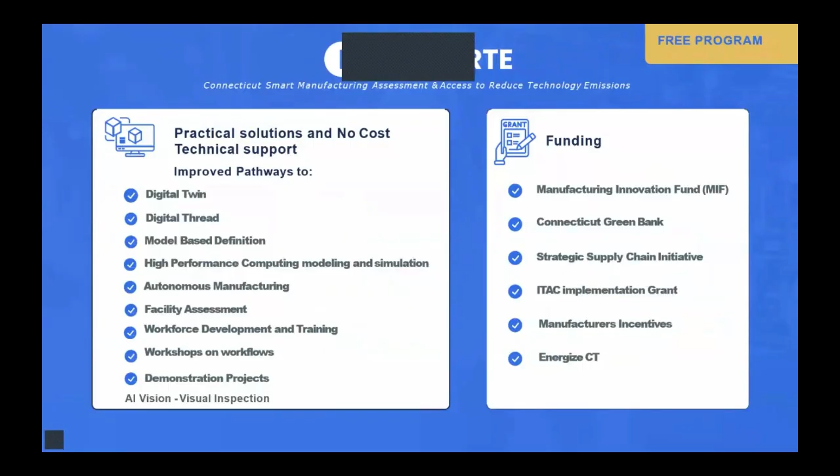So we have a very exciting presentation, as I mentioned before. We're lucky to have Lars Faller, Bobby Cole, and Dan Kavanaugh with us here today. I can't wait to have them come up to present the respective technologies that they've been pushing and advancing. I'd like to give a quick introduction to each one, so that you have a bit more background on who is speaking here today.

Lars Faller started his career in manufacturing and has held many roles, from manufacturing engineer to applications engineer to design engineer, before ultimately starting his journey at Siemens Digital Industries, where he specialized in the Siemens SINUMERIK control and advanced shop floor manufacturing technologies. 4 years ago, he decided to take the next step in his career and focus on account management. Today, he's responsible for leading the global automation strategy for one of Siemens' largest enterprise customers.

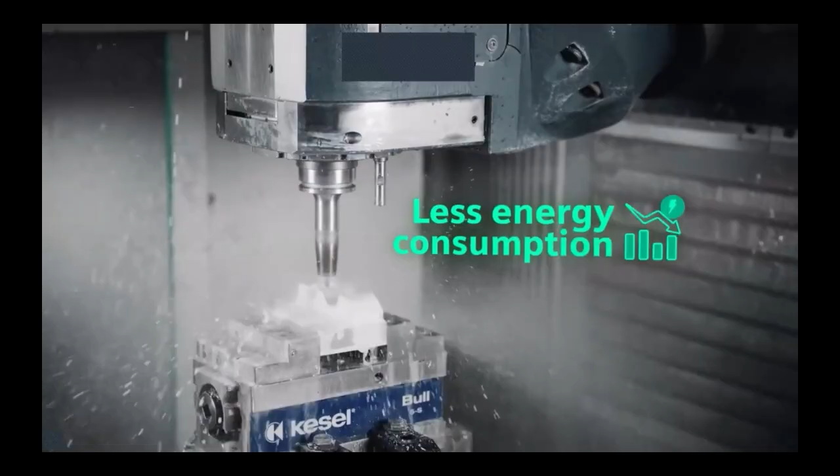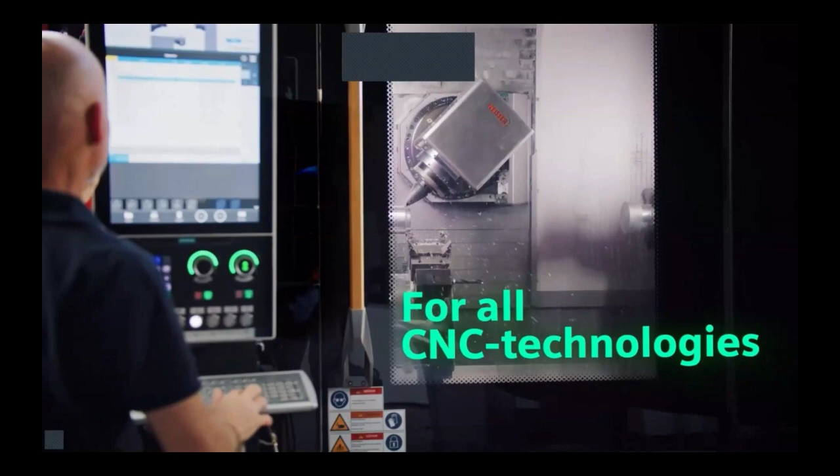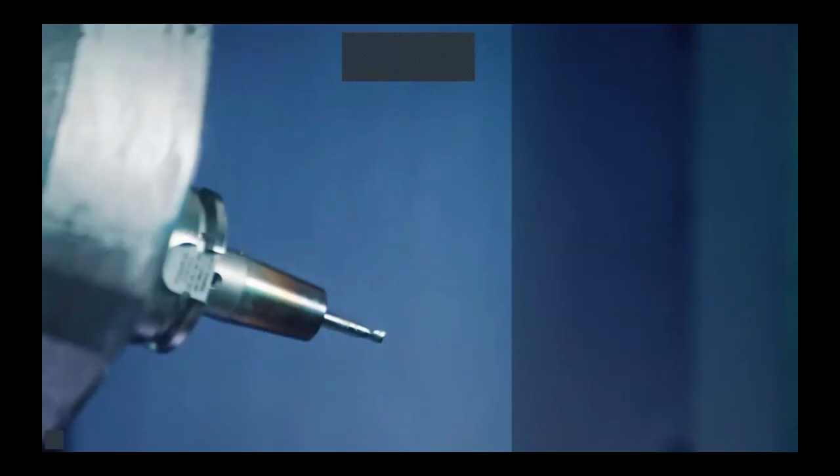Built for sustainability. Performance that leads. Designed for the future. Empowering the future of manufacturing. SINUMERIK ONE. Turn your ideas into reality.

Okay, that's enough with German music for now. So in that video, you saw quite a few things. Anybody who has any experience with SINUMERIK is probably well aware that the options there are pretty vast. If you were to get into the CNC control system and start to make changes, we have tens of thousands of machine parameters, options, applications, very complex. But I'll be here all day. If you guys have any specific questions, just let me know. Certainly, we don't have enough time to go through all the options here on the slide deck.

But beyond the Comau robot cell, there's also a vertical machining center. There's a second one being installed here shortly. We got some DMG Mori laser equipment back there behind us as well. So lots to talk about. The one thing I want to focus on now, and you saw it in the video as well, is that there's many different technologies represented from a manufacturing perspective. There were some vertical milling centers. There was some turning equipment. Obviously, here we're showcasing some robotic equipment.

The big takeaway here is that the SINUMERIK CNC control quite literally does not care what it's connected to. So it can be running a 2-axis lathe, a mill turn, a turn mill, a laser additive hybrid. It truly does not care, including robotics. And that's what we're here today to see and check out for the first time. And I'm grateful that we have Bobby and Dan from ThinkPLC here today, truly the subject matter experts when it comes to this integration.

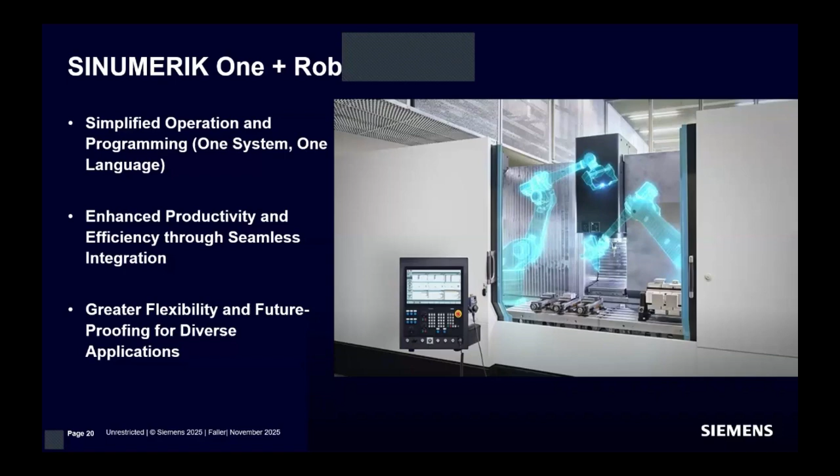Now we have a quick video on robotics, and I don't know if anybody's familiar with the trade show EMO. It just happened a couple of weeks ago, actually, in Germany. There's a very cool video that I like to put on here just to showcase some capability, because certainly using CNC for robotics and machining is something that's quite new and probably not really accepted yet. So

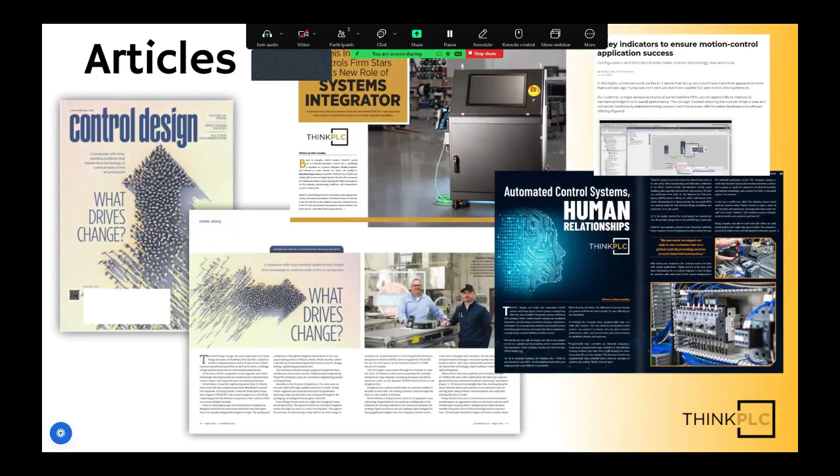Appreciate joining you. If you Google us, you'll find all kinds of propaganda, a lot of it using Siemens technologies. You'll see us in a lot of articles, whether it be for Krispy Kreme donuts, where we build all the control panels that go around the world on their control systems, or something integrating robots, pretty eclectic. Also, we're very active with education, which is one of the reasons why I'm here. So we like to get out in front of folks and promote what we do in technology.

And from a technical perspective, I would utilize and lean on the marketing and education capabilities of Siemens, like you have here. They have full webinar series. If you're interested in how to get into this world of making things work, there's free education out there everywhere. And some of that's through the TIA Portal webinar series. This just happens to be one that I joined on about a new programming language.

And to Lars's point, we're kind of a rarity. We're a systems integrator, but we're the only factory automation certified and machine tool certified integrator in the United States, making us very standalone or rare. But when it comes to education, I want to start talking about some of these buzzwords you're hearing.

So 5 years ago, I was educating board members at large corporations on what edge and IoT was. It was coming down that we have to go with edge, and if we don't do IoT, we'll be out of business in a few years. So I'm explaining in layman's terms what that meant for them. And so we advanced forward just to come back to what the digital thread is now.

And so large folks like Ford and the large automotive manufacturers have been focused on the digital thread for many years. And for us small to medium-sized manufacturers, we just couldn't afford it. We didn't know what it meant. And really when you hear people talking about the digital thread these days, what we're doing, we're backing up and we're trying to pull in more what we need, all right, as the end user.

What do we need out of what we're implementing technology? Because you don't just implement technology to implement technology. I wish you did, but that's not best for you guys, right? And so how do we define scope in a way? How do we leverage our lessons learned before? And how do we bring that back to the small, medium-sized folks? And that's what the digital thread is now. So I want to talk about that a little bit more.

So one of my favorite movies of all time is Apollo 13, just amazing drama about heroism, American history. Everybody know those five famous words? What were they? Houston, we have a problem, right? So it's really a story about systems, believe it or not, logical systems.

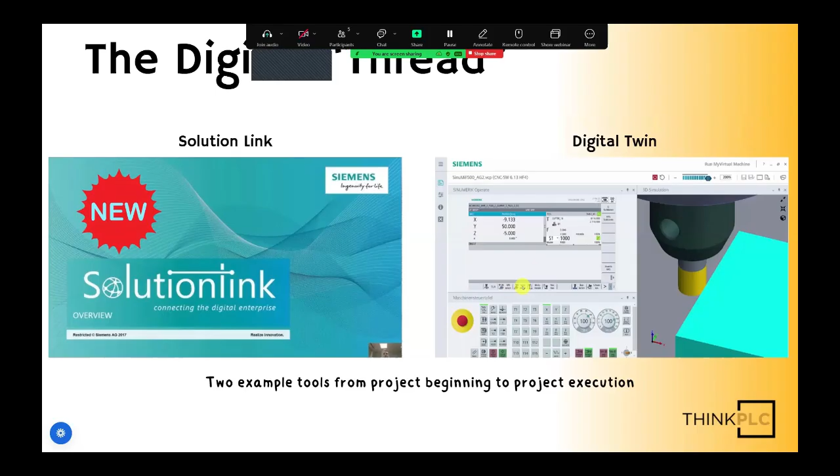And what that does is instead of just, you know, Bobby has some little buzzword or some technology he's good at, I don't just throw that at you. The end solutions or products, it's not even a conversation. It's about how to solve that problem, and then the product phase comes in later. So we're not just doing things the old way. And then when you implement the digital thread, the true implementation is going to be when you simulate, and even simulate where you're tied into the real world. So you're connected to the real world system. So we'll show you a little bit more about that today.

Some other new technologies are out there. Everybody's on the AI kick, right? You got to be in the AI world. For us implementing this technology, there's a new website available by Siemens called the Automation Knowledge Guide. Think of ChatGPT, because that's essentially what it is, but it's focused for Siemens, and an operator can say, why did my machine stop with this fault code? And not only will you get the product manuals that could be engaging for that, but you can also have this write code for you. So Ryan and I are pretty nervous right now. AI is basically writing PLC code, which is how we make money. But it actually puts out really good PLC code, G code for your SINUMERIK machine.

If you forgot syntax, you can ask it. It's a free utility. It's out there. It's available. From a design perspective all the way through to an operator perspective, it's going to help you guys out. So I suggest you play with it.

Okay, while we're here, Run MyRobot. You've obviously heard a lot about it. It's where we're taking Siemens product technologies and implementing them on what we consider a commodity robot. Through the partner ecosystem like Comau and other manufacturers, we're taking the industry standard. I want to make sure this is clear: you don't have to design your robot. We're taking an industry standard off-the-shelf robot and implementing Siemens technologies on top of it to make it do what we want it to do. So I'll explain to you how ThinkPLC plays into this.

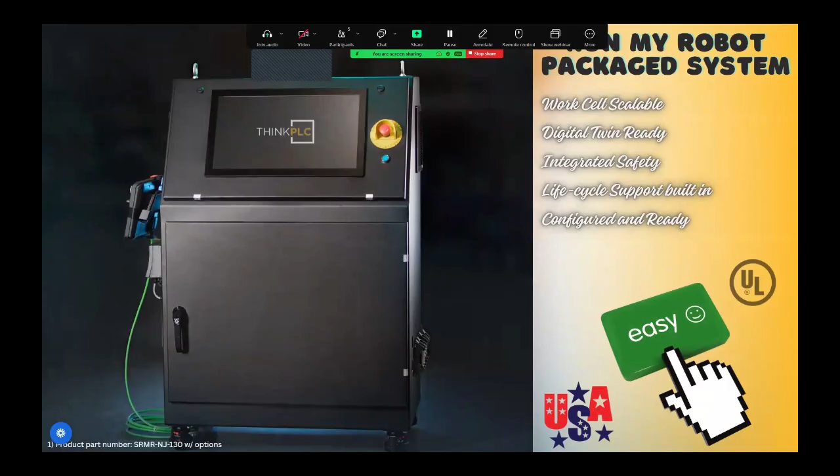Siemens makes this great hardware and software, and then you have folks like Comau who make an amazing robot. So who's in the middle of that? That's ThinkPLC. We have an American-made control system that's packaged up. We've become the easy button for Run MyRobot applications around the world. We have this packaged up to make it easy on you and your customers. As an example, we assemble these down in North Carolina and ship them around the world.

There's an example of an NJ130. That's a big old robot, and we've sold many of these packaged with our Run MyRobot solution. Our solution is a UL certified system. It's basically an enclosure with all the good stuff, the software and hardware done for you. You have the low voltage control system, as we'll talk about in a second. You're going to see this box in action next door, by the way, so we won't PowerPoint you to death today, I promise.

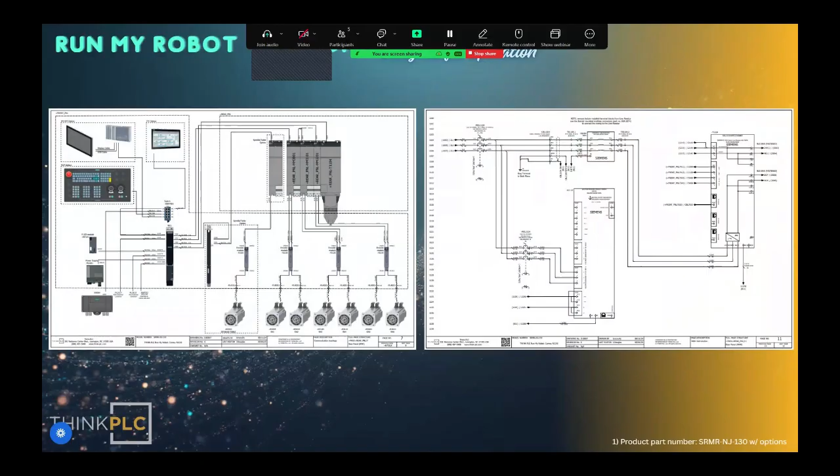Why would people do this? Because we've already done the heavy lifting. We've already done the design. You get to own all that. You plug this in, put power on it, start your robot up, and you're doing machining processes. Some of the other things we've done made it easy to connectorize. Just like your standard commodity robot, we have a teach pendant deadman switch that you control, but you have additional features like hand wheels, like you have on a machine control panel if you're used to the CNC environment.

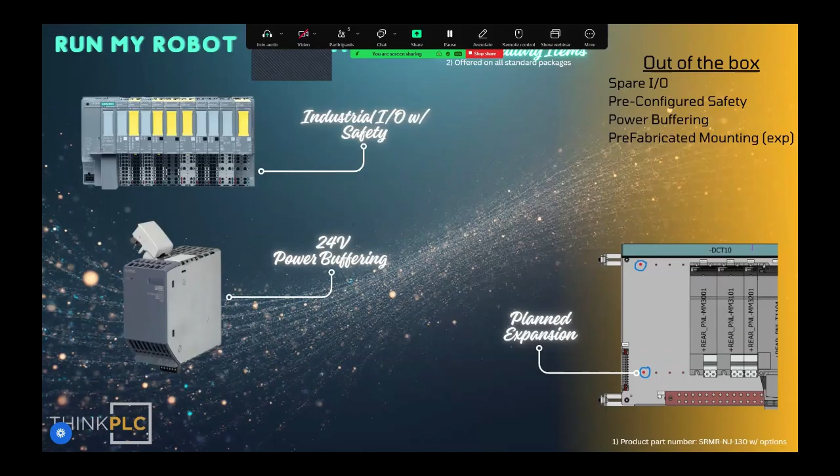Other things are industry off-the-shelf products like Siemens drives and IO. These are things you can call a local distributor for. They may or may not have them on the shelf, but they're more commoditized locally, because these are the same products we use in factory automation projects, like running a conveyor. We've brought those into the same package. As an example, this is what these boxes look like when they're all packed up and ready to ship.

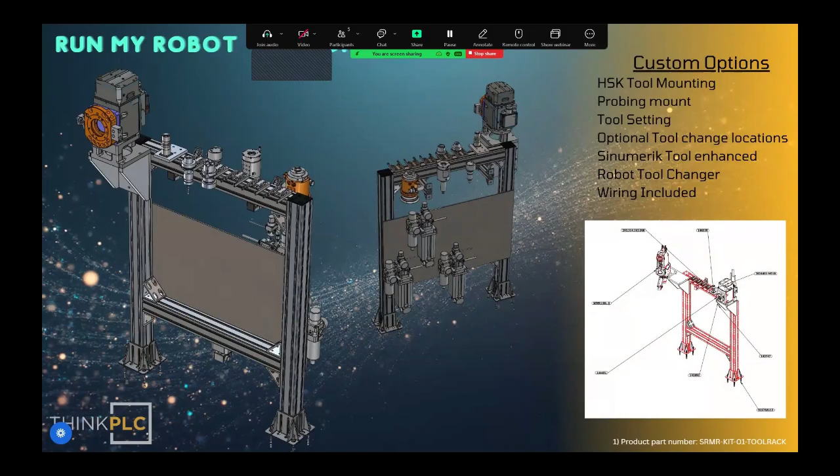Other ancillary things we educate people on are solutions around the robot: machining, welding, additive. These are common practices. We have spindle enclosures, so if you need to do tool changes and run your spindle, we have packages already pre-built so you can go to market with your robot doing the machining process. Things like tool stands, where you can uncouple your weld head and pick up a milling head. So you have a multi-purpose machine you can customize. Instead of a fixed DMG Mori machine, you can machine with a robot, then laser weld or MIG weld with it, using all the same features you get in other CNC applications.

Often with our robots, we package probing solutions like Renishaw and Blum packages. We're a Blum distributor. Just like in a CNC mill or lathe, you need to probe the part to find it. Or if you want to reverse engineer a part and build yourself a CMM, you can have the robot do that. This is getting very popular, especially in aerospace. The great thing is you don't have to do anything custom. You can use the standard measuring cycles, or probing cycles, built into the control platform, with no custom software needed.

Then it comes to advanced safety. You have a robot. These are not collaborative robots. These are very beefy, very complex systems. You can now integrate what's called SIMATIC Safe Kinematics.

And so what that does is allows us to essentially build virtual fences from a safety perspective. And then using the TIA Portal software, we'd use to program the PLC that's, I don't know, running a pump in the building, use that same software to build the safety system.

And so instead of having multiple PLC manufacturers, then a robot manufacturer, which is very common today, we can do it all in the CNC PLC. We don't need other control enclosures and other technologies. You can do it all built in the same platform.

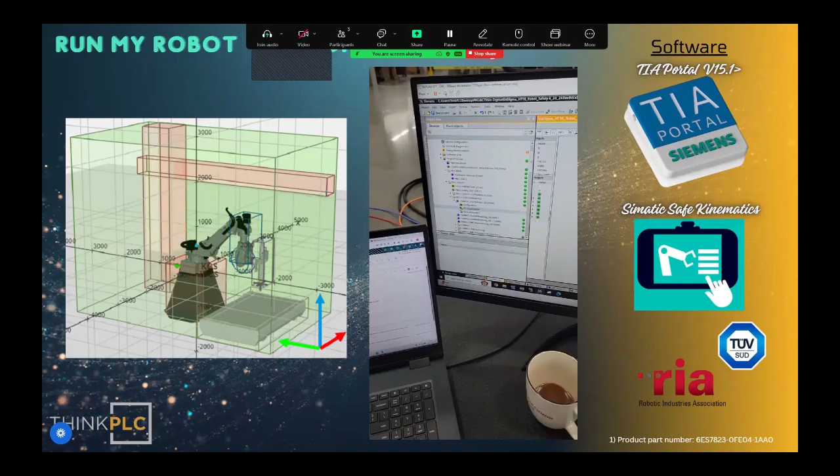Okay. So when you put all this together, there's a way to digitize it so that you can build your PLC program. You can build your machine yourself by embedding in your step files for your machine. You can animate those just like you would in SolidWorks, NX CAM, whatever you use. And we bring them into the digital twin. I'll just bring that up for you.

So there's two platforms. There's one called Create My Virtual Machine, and then there's one called Run My Virtual Machine. So Create My Virtual Machine is where you as the end user, whether you're a machine builder or you're just an end user that builds your own machines, it allows you to have a virtual CNC system. It allows you to bring in your step files or STL files, however you like to work.

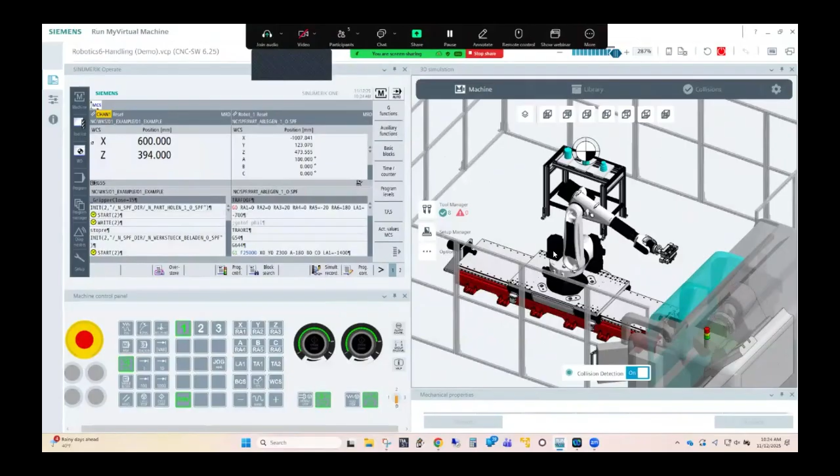And then you can animate those, like you see the robot with the lathe here. And what that allows us to do is then automate our system. I turn on the TIA Portal PLC simulator, and then I can pull up TIA Portal and I can do all my ladder logic or SCL language. So I can actually test my PLC and how it's going to work alongside the CNC control. It seamlessly is built in.

And then we can add on to that what's called the SIMIT software. So if any piece of this I have real world hardware I want to work with, SIMIT software takes the digital world and connects it to real world hardware. So you can have the downstream machine not available yet. You can put my real machine in SIMIT and then use the digital twin to parse the actual production line.

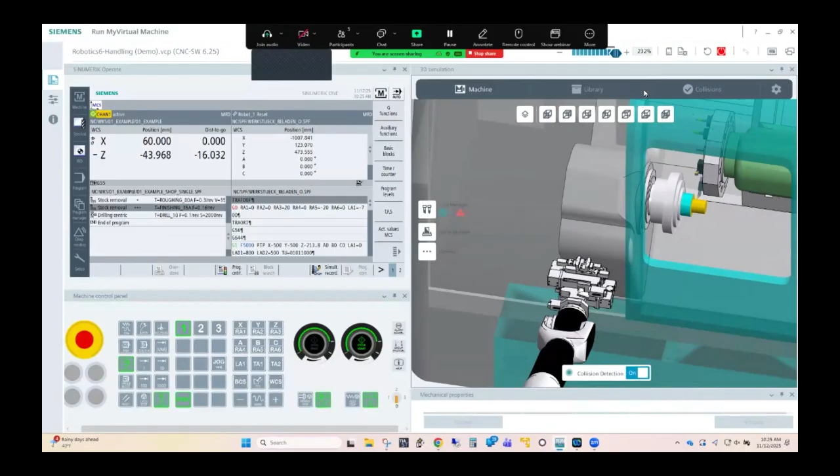We're actually doing machining processes as we speak. This is good. This is something that came up recently. Obviously, you see it removing material. If you're doing additive where you're laser welding or MIG welding or 3D printing, you can actually have it grow the material. So you can see your additive product actually create inside this platform. So it's being used quite often for not only removing material, but adding material.

Have I lost anybody yet? Any more jokes? Okay.

So it's cool to talk about stuff. Then it's like rubber hitting the road and actually making things work. So a couple use cases that I want to share with you, and what's great is I'm talking about these use cases with partners, or what we call our ecosystem, where we've worked with Comau. Comau supplied the robots either to ThinkPLC or sold them directly to our end customers, which is fine. And then these end customers or partners will use our control package because it's the easy button, right?

Could they build that control panel? Probably. But why, when ThinkPLC has a UL sticker on it and it works? So it becomes the easy button. In this case, our partner is Six Sigma, which is an amazing NX CAD CAM supplier, big in aerospace. Some of you guys may know these folks.

We were brought a complex task that I can somewhat talk about. I can kind of show you with cartoons. And I can talk about how we probed this part, and we did very advanced motions to work about this part. I can't tell you what we did on the part, just say that the part was profiled. And so as you're getting the hint, we used the NJ130 just like CCAT has here with the HITECO spindle, and we used the probing package to do just that, and saw amazing success with that.

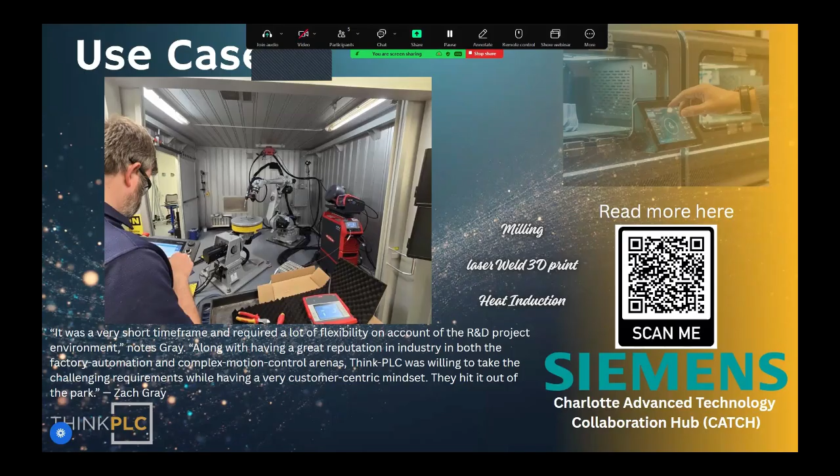So I'll just wrap this up in what Run MyRobot isn't, and you'll see some processes live over here. Run MyRobot is not a commodity application. We're not going to do pick and place, right? You're not going to be palletizing boxes on a pallet. If you can do that with an ABB robot or a FANUC robot, that's great. I'd suggest Comau, but nonetheless, they can all do that.

If you need a very advanced interpolator that is very, very precise, okay? If you need to interface with a SINUMERIK CNC control, it's a good solution, okay? But what it's not is a commodity style robot. Is it affordable? Yes. Are creative applications doable with it? For sure.

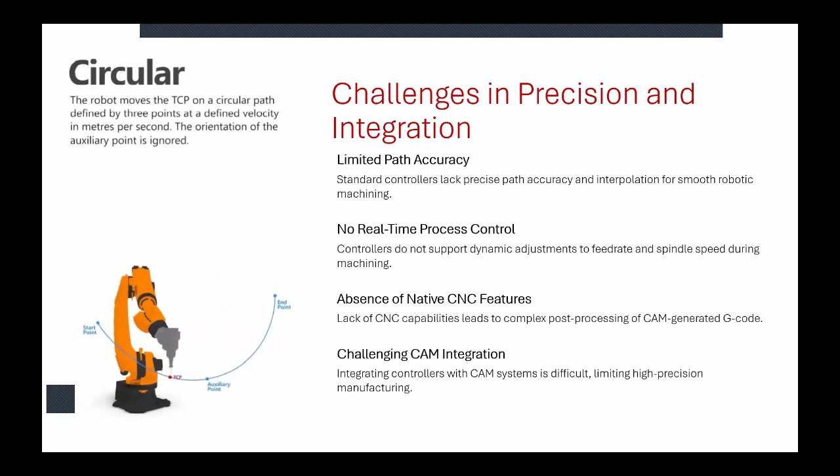Absence of native CNC features: lack of CNC capabilities leads to complex post-processing of CAM-generated G-code. I'm going to go through a walkthrough in a couple slides that compares the workflow of generating a machining program on a standard robot controller versus the SINUMERIK ONE, so you'll get more detail there. And then it's challenging to integrate with CAM. Integrating controllers with CAM systems can be difficult, limiting high precision manufacturing with standard robot controls.

Let's take a look at how this compares with SINUMERIK One and Run MyRobot. We have that background and the introduction of the technology with Lars's presentation, and of course with Bobby's presentation as well. So some of this is going to be repeat, but from our perspective, I'd like to run this video real quick. This is a Siemens production here.

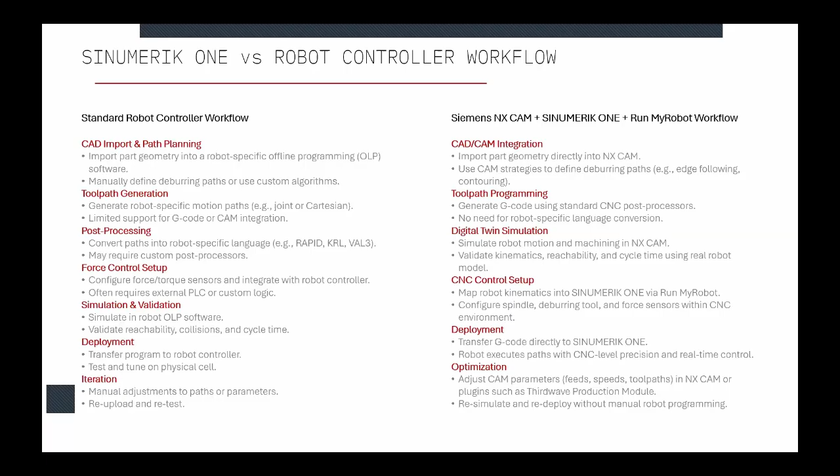Another quick video to show force control. This is a Siemens production.

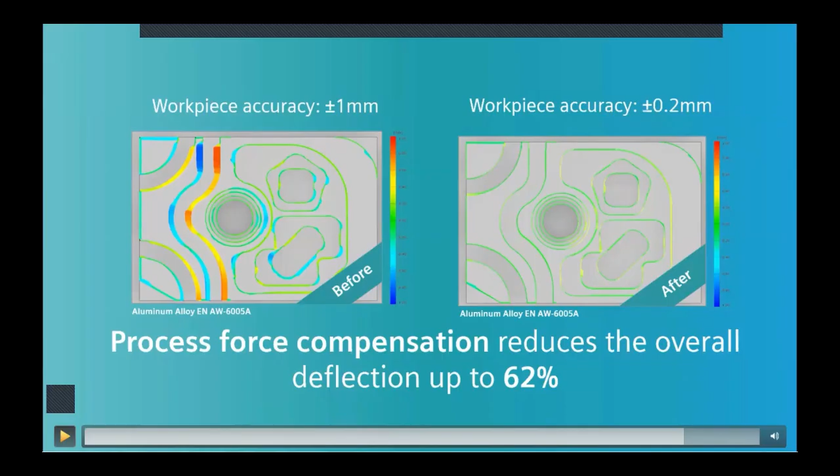So we saw a little bit about the force control feature there, where the system adjusts pressure dynamically to maintain quality and avoid part damage itself. There's adaptive pathing, so real-time response to part geometry ensures precise deburring and polishing, as well as machining. I left that one out. Sensor integration. Sensors provide data enabling dynamic parameter adjustments for consistent quality. And then altogether, you have improved quality and reliability using robotics for these types of machining applications.

So in this video, this is kind of going into now the end effectors and what other kinds of technologies you can add to the system. And here we're going to be showing an ATI radially compliant deburring tool. What this is, it allows you to further compensate for geometry distortions or actual geometry that you're processing on the robot. And you'll see here that the actual deburring tool will give way, and it's controlled pneumatically. So you can allow the tool to be more rigid or more flexible depending on the air pressure.

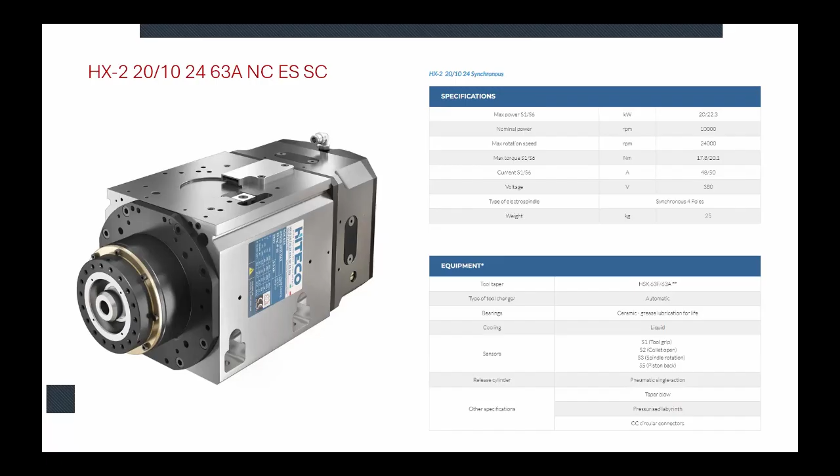So here, it's full synchronous, so that means that we can do tapping, we can dynamically control the RPM on the spindle. And this is gonna allow us to do robotic machining demonstrations for you. So again, the system that you'll see when we go over there is being set up not for CCAT, it's being set up for you so that you can come and actually see what the robot with this advanced controller along with these end effectors are capable of doing for you and for your businesses. And of course, you've met the solution providers here that can go in and very quickly stand up these solutions within a matter of days.

These are some future integrations. We're going to get an orbital single lathe positioner. The model here is a PTS ORB 1000. It's a 2-axis, essentially like a trunnion table. So we'll have 8 axes of manipulation on parts. We already have in-house the radially compliant deburring tool, the RC 230, not the 490 that you saw in the video. It's a little bit of a different system here. And then an axially compliant finishing tool that is the AOV-10. Both of those, the deburring and the polishing tool, are from ATI. The orbital single lathe is from Comau through ThinkPLC.

So again, with the high-end CNC control, you're mapping 5-axis tool paths to 6 motors on a robot, right? How do you control those motors in such a way where you can achieve an accurate end product? And the Run MyRobot solution does that. Tool synchronization: machining tools like spindles and deburring tools are synchronized for seamless operation through the control, not through a separate system. There's safety and tool changer integration that's possible here. So Siemens PLCs manage safety and tool changes to ensure efficient workflow, as mentioned. This creates a really robust system platform. So the configuration supports advanced robotic machining with high payload precision.

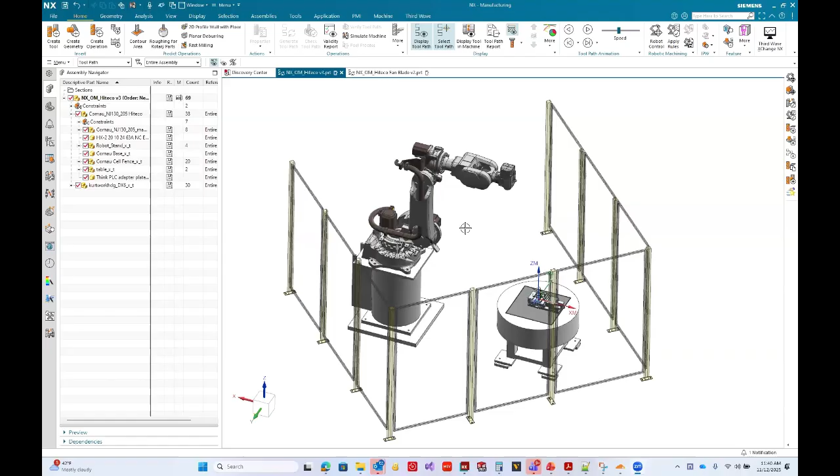So here I'm in Siemens NX in the CAM environment, and we have our cell built out in here. If you just look at the Comau NJ130, this is what's called a machine kit. And I have my part in the vise here on the table. This is our demo piece that consists of a lot of different kinds of prismatic features, along with some that are not prismatic, just some surfaces there.

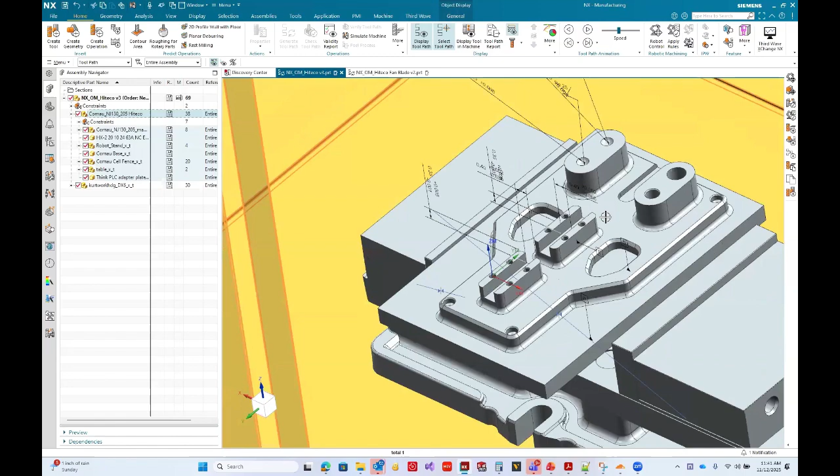And in the past, we have shown how we can actually use all the advanced functions within Siemens NX CAM for it to actually generate the CNC operations for you. And it does that by analyzing the geometry. It does a manufacturable feature extraction. So it looks at the slots, the bosses, the facing opportunities, holes, chamfers, things of that nature.

And then furthermore, it can read the PMI that's attached to the particular feature. So you notice that there's a surface roughness attached to this surface here. There's a diameter call out on the surface here. And what you can do in Siemens CAM is you can set up what are called operation sets. So you can actually teach it the logic that you would normally use to come up with the strategy to produce that feature. That was a previous demo, so I'm not going to go into it in depth, but just enough for the audience here, so you can understand what those functions enable.

But for now, in this particular environment, I'm just going to show you what I did to set this up for the machining operation. So right now, I'm in my assembly navigator, and I just want to hide the fence so it's not in the way. And I'm going to go down to my operation navigator here. And then here I have set up my operations for actually producing this part.

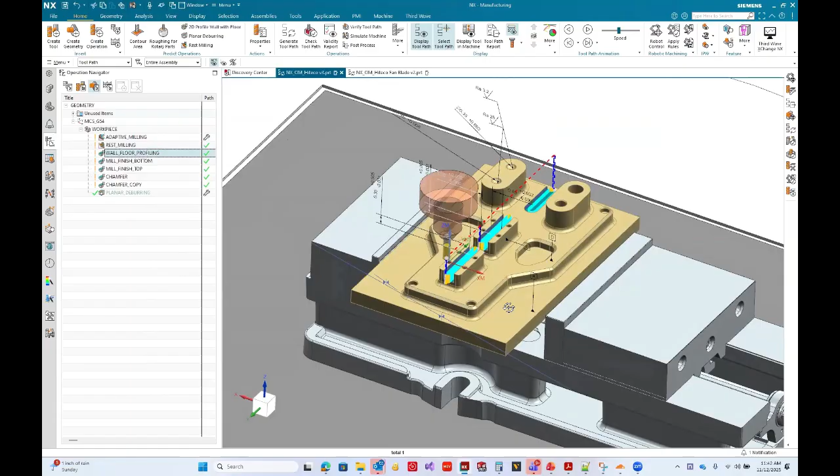So if I zoom in, I first have my adaptive milling path. And you can see a preview of the tool and the holder that's used to cut that path. Then I have a rest milling operation, then a wall and flooring. And then I have some operations to smooth out the edge blends there. The chamfers at the top of that part, a chamfer along the outside border, and then a deburring.

So the demo that we're going to run is going to be on the deburring, but I'd like to just quickly go through to show you how quick it is to set this up. Even though I'm going to do this manually here, there is a model-based workflow so that you would just have an edge break call out on the edges from your design software, and you would simply import that into the Siemens NX CAM environment, and you can just click a button and have it generate the deburring process, so long as you had taught it, based on the material, based on the tool that you have, certain conditions, to generate the type of toolpath that you would normally have generated.

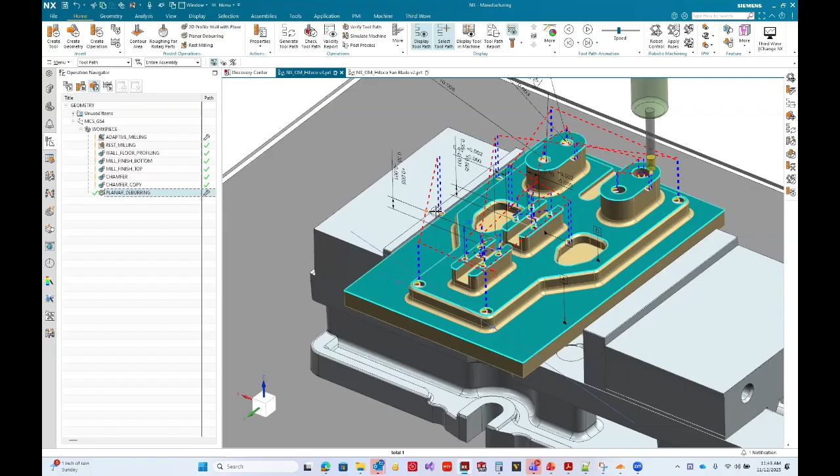But here I'm just going to walk you through. Since I already have that one set up, I'm going to do a new one here. I've got to hide my... So what I can do is I could just right click on the last operation here, and I'll go to insert and then operation. And in this case, this is a planar part, so I'm going to stick with my mill planar type. You can see I have a whole bunch of different operation types in here. So mill planar is what I'm going to go with, and then my mouse is hovered over the planar deburring toolpath. So I'm going to click on that, and I'm just going to give it some information.

So my program is going to go under my program, which I have specified down here. You can see the program. I've got my tool list here and the available tools. And then this is really my geometry view. So I'd like to stick in this view because it gives me a clear view of my machine coordinate system. So in this case, I'm using a G54 for my offset. And my G54 here is actually located on my part at the top hole here. I could put it somewhere where, if we were to use a probe, we could use the probe to get that point. But in this case, I just put it here on top of this hole.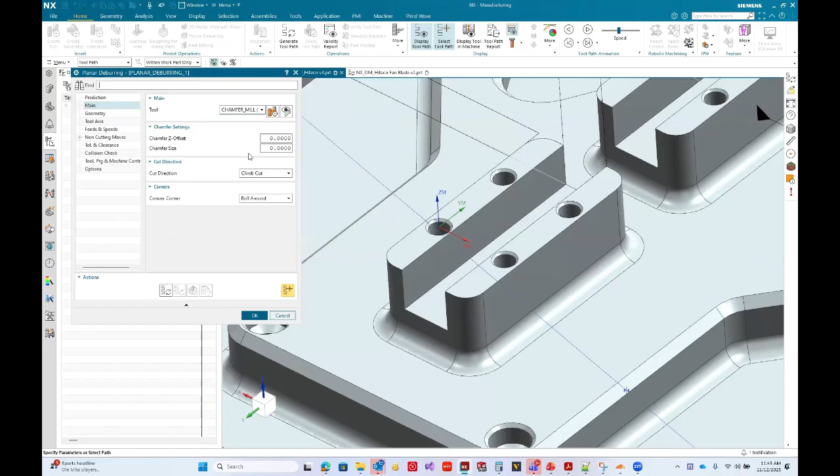So I'm going to use my chamfer mill that I have already in my tool available to the robot. The geometry is my workpiece here. So you can see I named it workpiece. So I'm going to choose workpiece. And then for my method, I have different methods that I can predefine. So if there's specific parameters that I want to use for finishing or for roughing or for semi-finishing, I can choose those. For now, I'm just going to hit none and then hit OK. And then this will bring up the dialog for the deburring. All I really have to do is just go to the geometry tab and click on specify cut area. And I'm just going to click on the top faces here.

Right, and maybe this one as well. So I'm going to deburr all the edges that NX CAM recognizes having selected those faces. I'll click OK, and then I'm just simply going to hit generate. So that creates my toolpath, and I'm going to click OK.

Now, the important piece is, how do I go from here to simulating the robot motion? With robots, because you have more than 5 axes of manipulation, the robot can reach a target with multiple different orientations. So it can reach a point with a specific orientation, or with the elbow up, elbow down. You can have the 5th axis flipped. To simplify, there's multiple solutions.

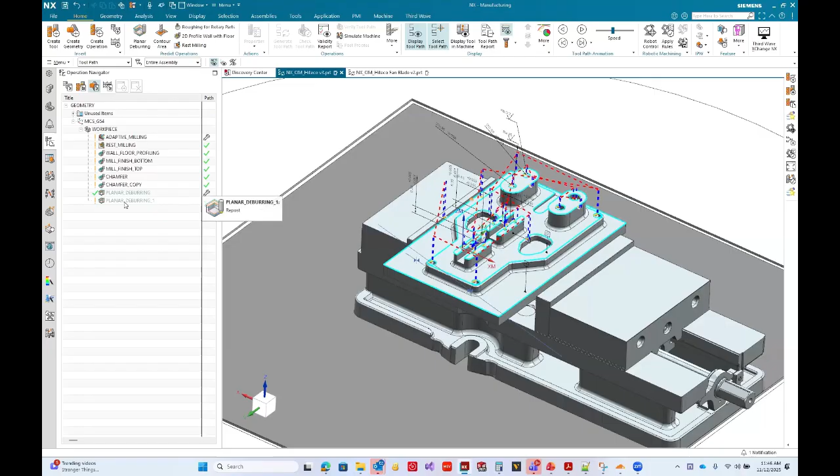So you have to guide the system in telling it what configuration or what orientation you want it to reach this toolpath. So the simple way to do that is to click on the toolpath itself and then just go over to the robot control, and that'll open up your dialog. So I have all my robot axes manipulators here. I also have my configuration. You can see my joint 3, 5, and the OH here, and you can see that by default, it's approaching the toolpath in this orientation.

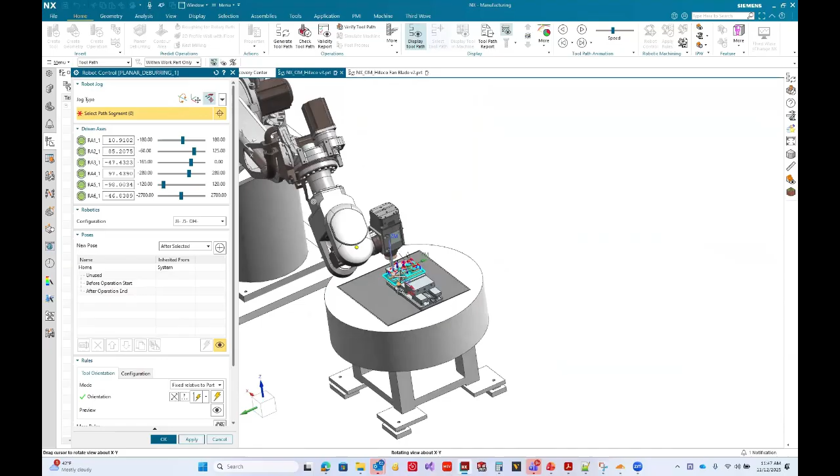Now, if I wanted to change that, I could select an all negative, and let's go down to my tool orientation. So right now, my tool orientation is defined as undefined. So I'm going to do fixed relative to part. And what I'm going to do is I'm going to set my robot somewhere where it's easier for me to see where that tool is interfacing with the part. And then I'm going to bring up my manipulator, and I'm going to choose my Y axis to be positive.

So once I do that, I can hit the preview button, and you can see here that this looks good. This is the way that I would want the robot to approach the tool. You can see that if I flip my 5th axis around, you see how that knuckle kind of flips over there? So I can approach that with 2 different orientations. That's very important. You have that level of control here right within the CAM solution. So at home position, this knuckle is flipped around this way. It's in the negative position. So I'm going to keep it that way for its approach. That's really all I have to do.

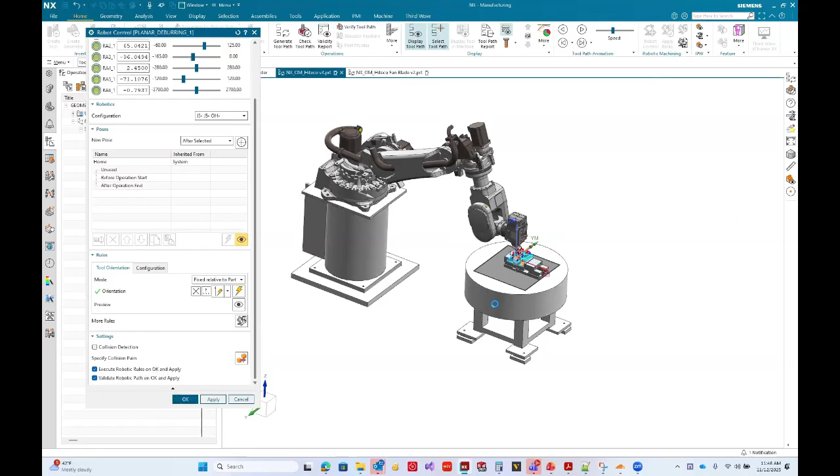Now, I'm just going to want the system to execute the robot rules when I click OK, and then validate the robot path on OK. So I have those 2 checked on. Otherwise, I would just go and hit apply rules and then validate. But in this case, I can do it here. So if I hit OK, you'll see that my path should turn green. I'm sorry, I should hit apply. So you can see the actual path. So it turns green there. That means that the robot can reach all the positions, and I'm good to go.

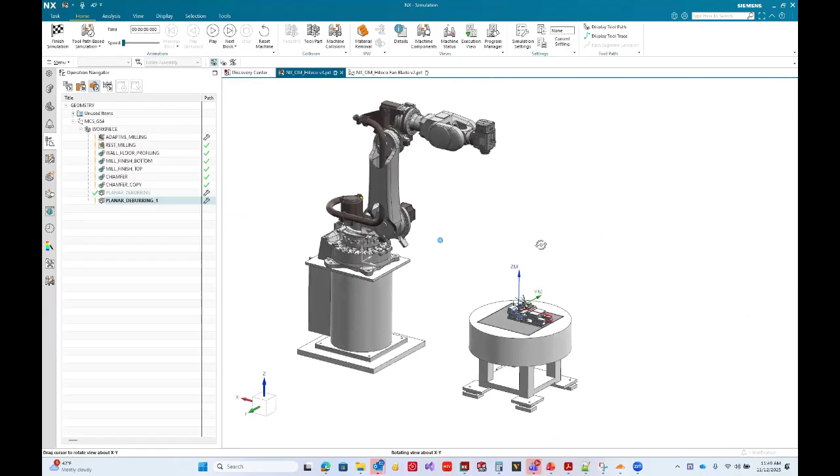The next stage is really just simulating the robot motion to verify that it makes the right moves in order to reach the part and then start the machining. So I have to select my tool path. I go over to simulate machine. And then I'm just going to put the speed down here. And I'll zoom in here as soon as it gets close to the part, but I'm going to hit play. And you can see that it brings the tool down to the edge of the piece for the deburring operation. I'll speed this up so you can see the robot motion.

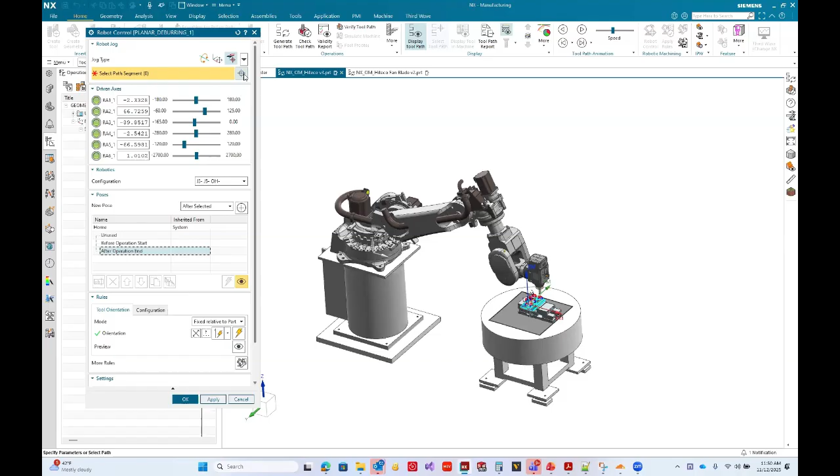Some other things that I can do here is, you see how my 5th axis is in line with my 4th axis. That's sometimes not a preferred position for the robot because you're very close to what's called a singularity. So what you can do is, if I exit out of here and I go back into my robot control, I can actually add a couple of poses. So you can see here that I have a before operation start and an after operation end. I can add some poses in there. I want to tilt my 5th axis a little bit. If I go to, sorry.

I just want to show you this before I go into the path itself. You see how I have my axis manipulators here and I'm at home position. Right now, my RA5, which is my fifth axis, is highlighted as blue. What that means is that I'm close to a singularity. The system can still calculate motion, but it's recommending that I move that fifth axis so that if I do proceed forward with the robot, I'm able to actually execute through the current position to the end goal, which is to reach the part.

So what I'll do here is choose this, go back into my robot control and add a pose. For the first pose, since I'm here, I can add an approach. If I hit tool control jog point, you'll see that I get a manipulator on the tool center point. And I can just move this up and say that that's where I want the robot to come to from home, from the first pose to the second pose. I want this to be defined as my second pose.

So after selection, I hit the plus button here to add a pose, and I'm going to call this pose 2 and hit enter. Now I want this to happen before the operation starts, so I'm going to pull this down. And then I also want this motion to occur to this position after the operation ends, so I'm going to copy this and then paste it here.

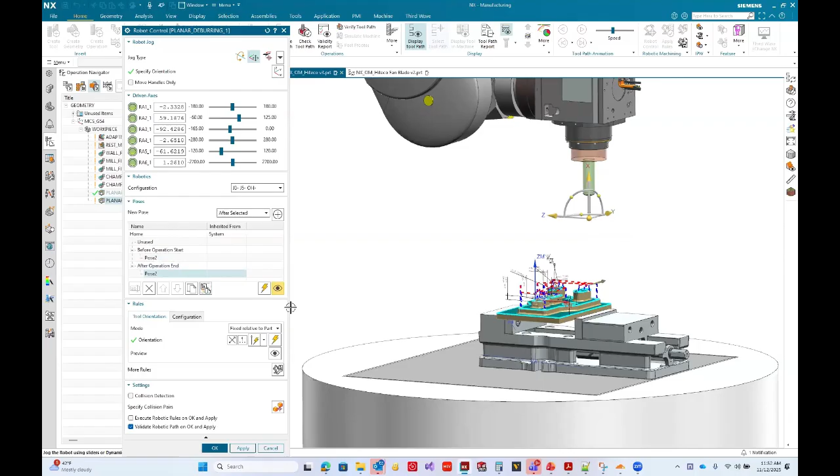The next thing I want to do is, from my home position, start off in a certain orientation. So I'm going to go to 0, 0, -90, 0. And then for my fifth axis, I want to tilt this down maybe 20 degrees so that I'm out of singularity caution. And RA6 is going to be 0 as well. So I can define this as a pose to start with. I'll hit plus and add that as pose 1.

So after the machining, I'm going to go back to pose 2 and then into this orientation. I want to copy that and start off with that before the operation starts. With that, I can hit apply. Then I can go back into simulate machine, turn down my speed, and hit play again. You can see that it started off in that pose, approached the via point, and then went right into the machining.

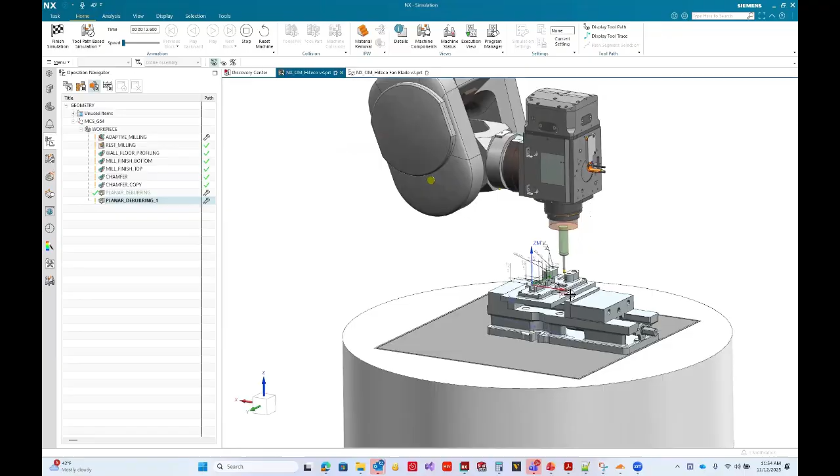So it's very simple because you have the full integration within Siemens NX CAM. I'm going back and forth very easily between generating CAM paths and assigning robot poses. If I'm satisfied, I just hit finish, get out of this, and then go to my post processor. I have a Comau NJ130 post.

I'm going to put this into a folder here. Actually, let me make sure I have this open. Let me generate a new folder here. I'll pick that NC folder. And then it's going to export it as an MPF file, which is what the SINUMERIK ONE control looks for. I'm going to go ahead and hit apply.

In just a matter of a few seconds, I'll have my G code, which I'll open up in that folder. Now I have an MPF file, and if I take a look at that in Notepad++, there's my G code. I didn't go through multiple different pieces of software. I stayed in Siemens NX CAM. I was able to generate my deburring path, add a robot pose, and generate my G code in very few clicks.

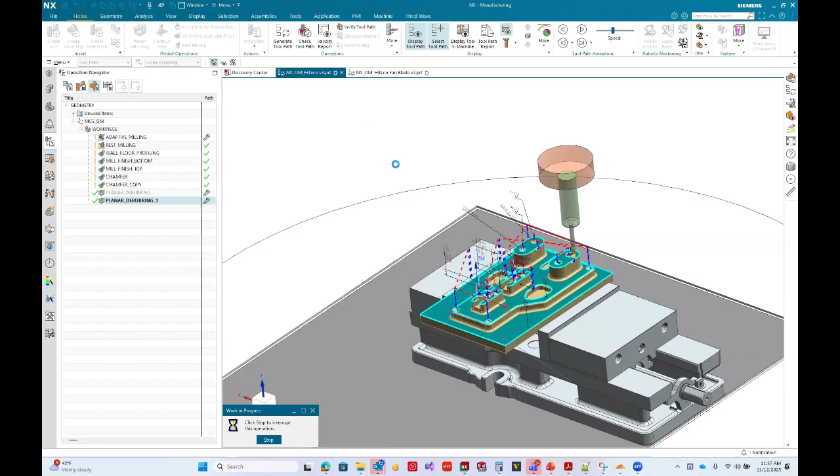Just gonna hit okay here. Let me switch over to the other part. All right. So here is a demo of a fan blade. This is something that we quickly modeled up just to demonstrate. So imagine we want to smooth the surface on this. So we want to do a polishing application.

And we have our Hiteco spindle, and we can put a padded sanding or sanding pad tool at the end of this. So I'll show you the tool path. We use the variable streamline path, and we can control the step over depending on the surface roughness call out.

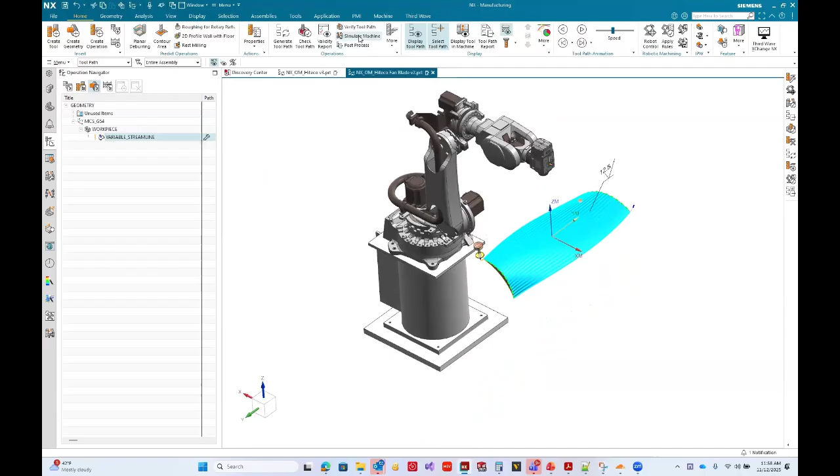And in fact, that can be encoded in an operation set, which is basically logic that NX CAM would have embedded within it so that it's in a position to automatically generate this depending on the PMI call out. But in this case, I'm just going to demonstrate this path. Let's go into simulate machine. And then I'll put my speed down and let's run this.

You can see there the sanding pad there. It's going to start off at one end, and then I'll speed this up just so you can see it. The robot is going to stay normal to the surface of the part at all times. So we have really fine level control over that.

We can, because we're in a CAM package, we have a lot of different parameters at our fingertips to exactly control how the end tool is presented to the part surface. So if we wanted to have a slight angle on it in any direction, we can set that up into toolpath parameters. We can control the speeds and feeds.

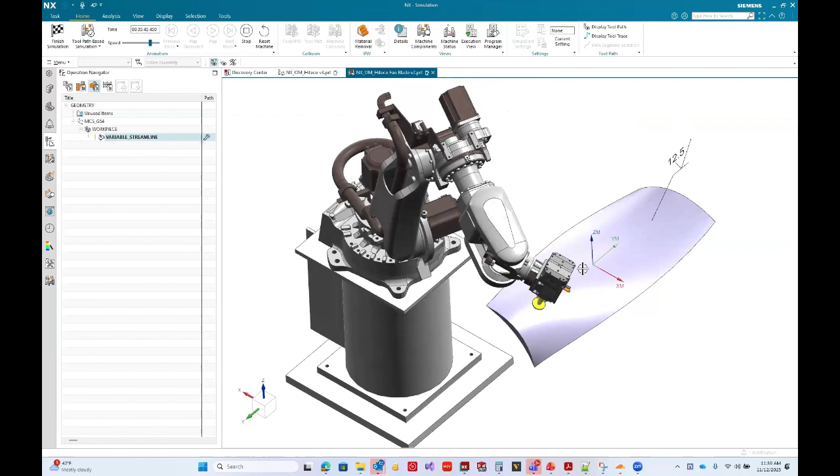We can even go into optimizing the path, either natively through Siemens NX or putting that into third-party plugins like Third Wave Production Module. I can also view my in-process workpiece, which I should have turned on here. Forgot to turn that on, but basically this gives your stock, and then as you're producing the piece, you can actually see the effect of the cutting tool removing that material.

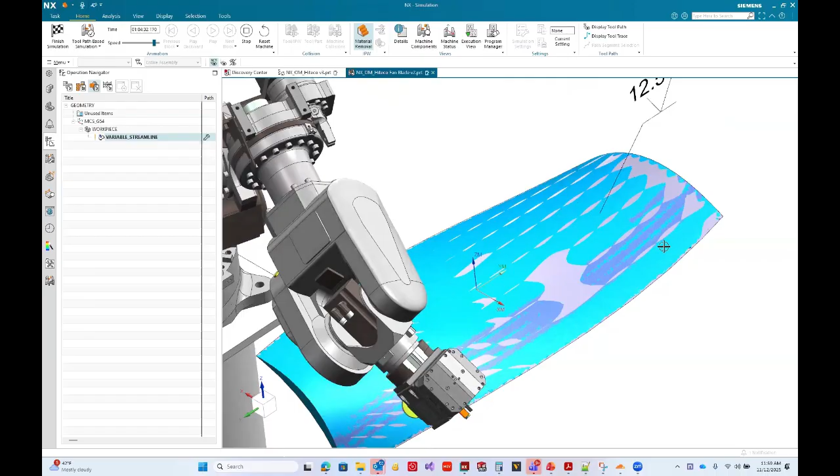In fact, I can go into displaying a much higher resolution version of my cut geometry and see where my deviations are at to further refine the tool path. So apologies for not turning that on before. I meant to do that. But you'll see a little bit about that here when I switch over to the computer again here. So if I finish this simulation, take that off.

There's just so many options here that I can go with in terms of what I have at my disposal. Here is basically the options that I used for generating this path. If, for example, this was a smoother surface finish call out, I could do a couple of other things, but amongst one of them would be to tighten this up.

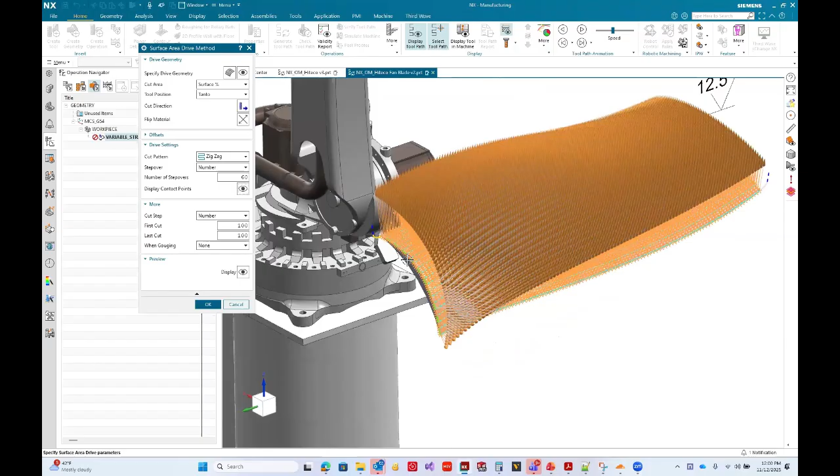So if I hit 60, you'll see that the spacing between decreases significantly. So the blue is before and the orange is after. So that's the new tool path. And you can see that, because I have a setting set in there to be always normal to the surface at any point that it's going to contact, you can see the normal rays that are projected up off the surface there. I'll cancel all of that.

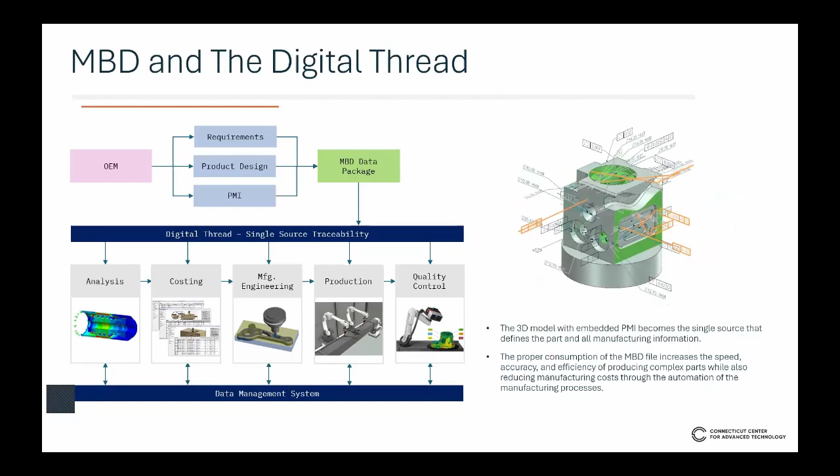Where normally you would interpret a 2D drawing, you would take a look at the requirements, like what material the part has to be made from. You take a look at all the different features that are contained within the part, and then you take a look at the tolerancing that those features have to be made to. You would typically make a decision, right? Okay, because of this material, I better use this machine, this process, right? This particular tool, especially when it comes to certain kinds of features.

And then if you have specific tolerances, you may want to think about the strategy, right? How am I going to produce that feature? If it's a hole with plus or minus 5 thousandths, you can do spot drill and a drilling operation. That's probably sufficient. But if you have a hole that is the same diameter, but plus or minus 5 tenths, or let's say 0 to plus 5 tenths, you may want to do a spot drill, and then a reaming operation in order to get it to within accuracy.

Or let's say you have the same requirement, plus or minus 5 tenths, but the hole is 5 inches in diameter. So maybe you want to do a single point boring operation. These are decisions that you make when you see information on a 2D drawing. That's what we call a human consumable data set. Digital consumable data set is the model-based definition you see on the right.

And what that enables is that if you set that logic structure, those conditional statements within your CAM solution, so that it knows how to make decisions based off of the information that you otherwise would normally interpret, but now interpretable by a machine, it can generate those programs for you. And now your work becomes validating the toolpath, maybe a small tweak here and there, but it by and large will save you on having to generate the whole thing manually.

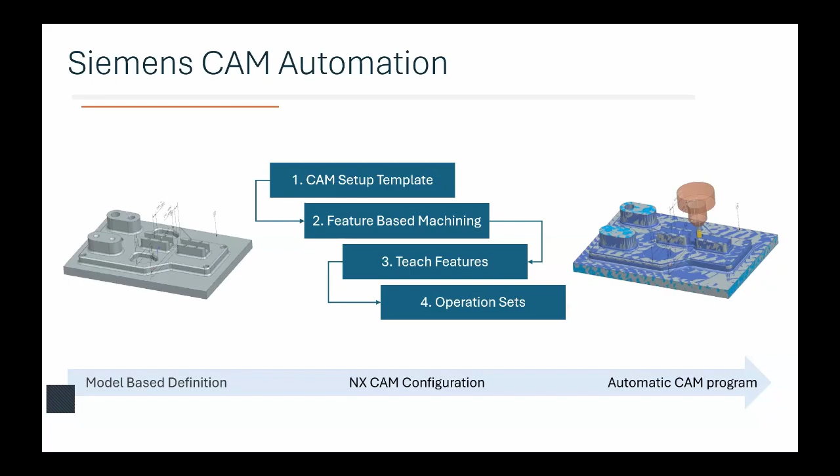One example that I want to show you is setting up an operation set. And in this case, you see that top feature, the two spherical indents on the part here. So these two top features here, they have a surface finish call out. One has a surface finish call out of 3.2 RA and the other one has a 25.

So because the feature geometry is the same, but the requirement is different, we could save time in machining by not finishing the RA25 to a smooth finish, right? We can finish it to an acceptable level, save time on the machining. And I'm going to show you how we set up the logic for NX CAM to actually make the decision on the toolpath itself, mostly guiding the step over distance for a ball end mill.

So what we're looking at here, we're going to go into our modeling environment within NX CAM. And all I'm doing here is I'm going to just double click on the call out to show you that it's recognized. There's a roughness of 3.2 on there. And if I double click on the other one, it's not only associative, but it's also semantic. So Siemens can ingest all of the information contained within the call out.

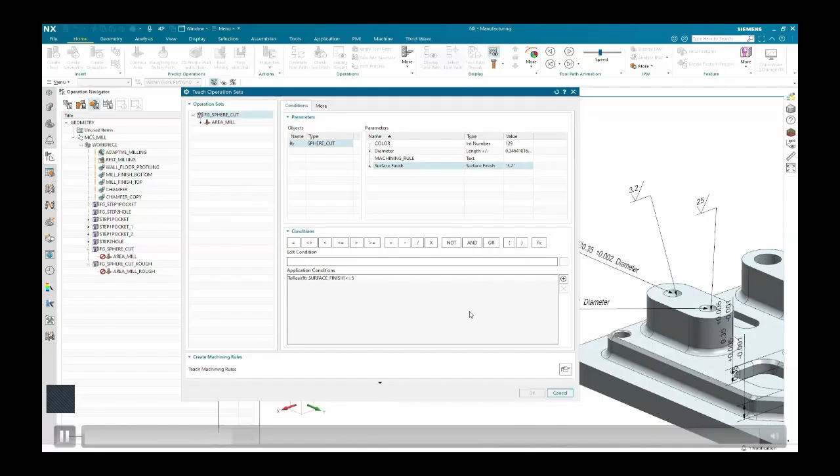So I'm putting to real parentheses, and then I'm clicking on the surface finish callout of 3.2. And then I'm saying that if the surface finish callout is less than or equal to 5 RA, I want to use the area mill toolpath with all the parameters that I have set up already in it.

And now what I'm going to do is set up another rule for a rough toolpath. I'm going to go back into my teach operation sets and set up this similar kind of equation, obviously deleting the one that I had in there previously. But this time I'm going to say that if the surface finish callout is greater than 5 RA, use the rough area mill operation.

What I skipped over there that you didn't see in this video, just so that we can save time, is a video that precedes this one where I actually go in and set up the operation to machine that feature.

Just like I showed in the live demo here, you right click in the operation navigator, insert an operation, and then choose from a number of different toolpathing strategies. In this case, it was a mill contour type, and I chose an area mill operation. Then I set up the parameters in the area mill operation to produce a smoother finish. I was controlling the step over, because I'm using a ball end mill, to reduce the height of the cusp that's left over between the step overs.

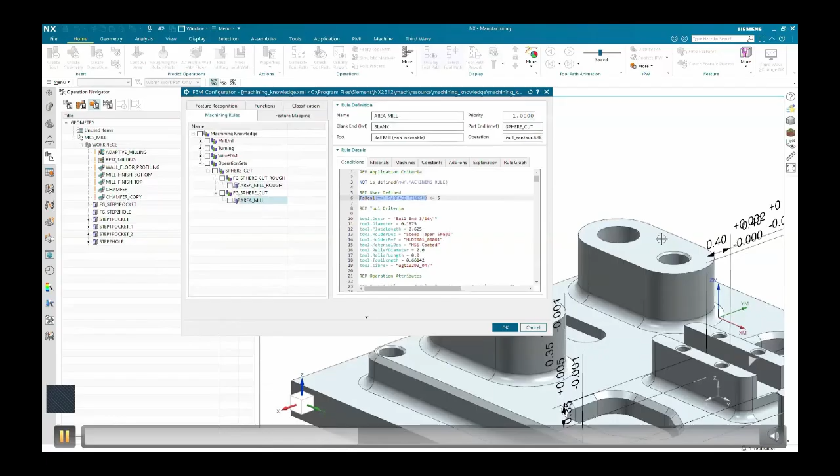So here, what you're going to see now is that I opened up the machining knowledge database viewer, went into my area mill operation, and I'm highlighting the logic that is now embedded within that operation set. All the parameters that are available in the dialog that I would typically have for the area mill are accessible. You can see them below that logic, so I can control any portion of that toolpath.

So now I am right clicking, and then I had it automatically generate. Let me go back because that happened fast. As soon as I come out of the view, and this is just to show that that equation was put in there, I'm going to select my 2 spherical features, and then I clicked on generate process. It opens up this dialog to say, okay, what kind of process do you want to generate, for what recognized feature?

And here I'm selecting my custom feature, the additional operation sets that I taught NX. I have all these other ones, like I can have it recognize any of the mill drill operations that are there, turning, wire EDM. But in this case, to save time, I'm just going to say use the ones that I just saved, and let's see what it does with it. So if I hit OK, it actually generates the operation set for me.

And if I click on the actual operation here, you can see that my area mill, not the area mill rough, is associated with the geometry that has a smoother surface finish callout. And then if I expand the other one, it automatically recognized to generate the rougher area mill operation for the feature that has a rougher surface finish callout.

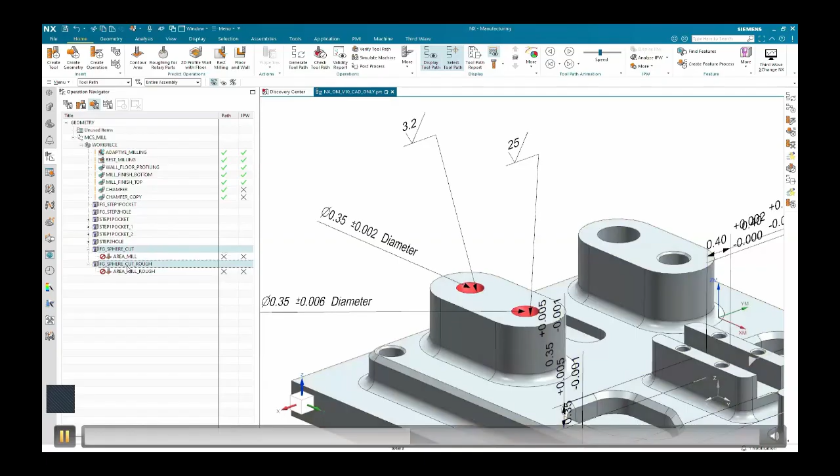And then it just becomes a matter of hitting generate, and you can actually see the toolpath that's created. Here is where it becomes more obvious. If I click on the two operation sets, you can see, because I went in with a spiral helix type toolpath, that the spacing between the spiral is tighter on the 3.2 RA versus the 25.

Now what I'm going to do is swap them around and have NX regenerate the toolpath to see if it automatically switches the actual toolpaths around. So I'm changing my 3.2 RA to 10, and then I'm going to change my 25, I think, to 3.

Or I guess to 4. So now NX recognizes that I changed something, so I have to accept that change in the manufacturing environment. So I'm going to go back to application and manufacturing. And then if I go to my manufacturable features, you see that there's a little icon there, and I just right click and I hit approve the change.

And then I can just do create feature process again and hit OK. So here I'm just, again, testing the logic. And if you see it now, it generated the roughing operation for the surface finish call out of 10 RA, and the smoother one for the 4 RA. You can see that tool path, the spacing of the spiral there, of the helix pattern. And then for the smoother one, you can see a tighter spacing there.

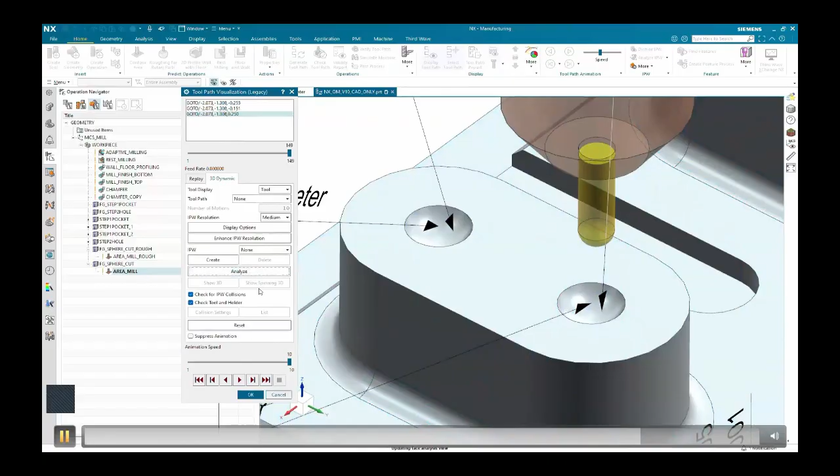So again, you teach it once, and it becomes a matter of clicking on recognize feature. It recognizes all the features, and then you right click on the recognized features and hit generate path. And it does everything for you once you teach it.

And here is a deviation view. So this is after I cut it. I can take a look at the simulated cusp height that would be left behind. So you can see that for the rougher surface finish, obviously it's a rougher surface in the deviation analysis. On the right is my smoother finish callout. I have a smoother finish there.

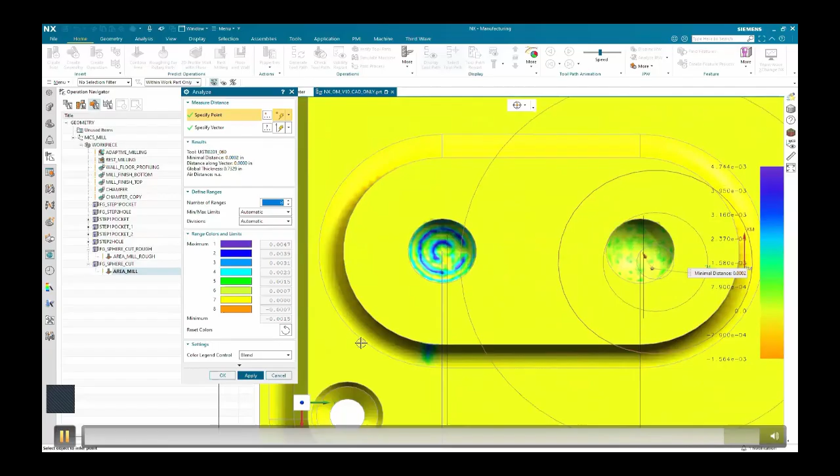So I can adjust my spacing based off of the simulation I get out of NX for what that surface would look like after the cut. So here I'm just clicking on different points just to see the actual deviation amount. So in the interest of time, I'm going to proceed forward.

All of that is to say that if you set up your CAM package to automatically generate your toolpath for you, you save a lot of time. I'm showing here a side-by-side comparison, time lapse of me manually generating the toolpath on the left for this part, and then having NX CAM run through the model-based workflow and generating the toolpath automatically. And then all I'm doing is validating the toolpath.

So I go from an hour, 25 minutes down to 8 minutes, 30 seconds. That's a significant time savings. In fact, on the programming time, it saves me 90%. That's an order of magnitude. If it takes you days, it'll take you hours. If it takes you hours, it'll take you minutes. That's what an order of magnitude means. It's a significant time savings.

Again, if you think about this, we're doing this for robotics, right? You have not only the accuracy and the precision that the SINUMERIK One gives you in the control of the motion of the robot, but you now also inherit all of the digital thread workflows in Siemens NX CAM because you're using that environment to program your robot.

Furthermore, we can continue on with the digital thread and do optimization of that toolpath. So we can vary the spindle speed and the feed rate based off of a physics simulation of actually cutting the material and how much force the tool sees, how much heat is absorbed by the tool versus ejected by the chip versus absorbed by the workpiece. You can calculate workpiece deflection and all that.

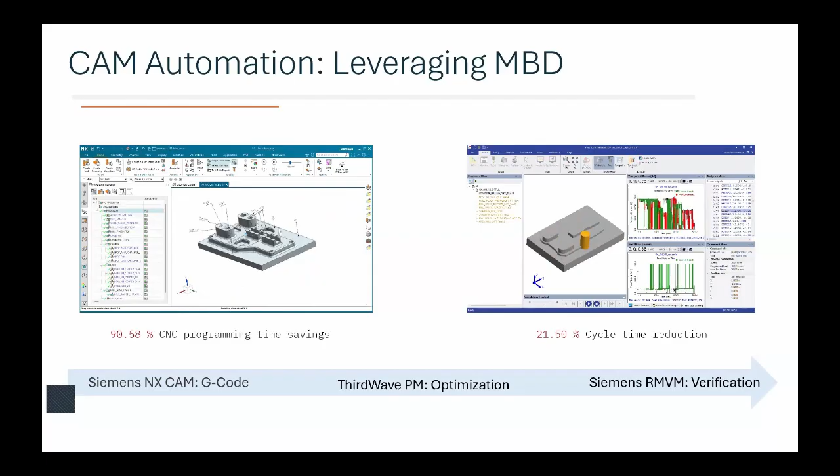So that's the digital thread. If we switch over to the digital twin real quick, the digital twin, in this case, we talked about Run MyVirtual. Bobby had presented along with Lars the Run MyVirtualMachine, right? Which is the virtual representation of your machine. So you can actually run posted G code in that virtual environment to do all your verification, right? That's the digital twin.

The other side of it is when you start to talk about AI and machine learning. And we're talking about here AI-based digital twin. So if you're running your processes, you want to be able to collect real-time data and as much data as you can. So let's say you're in a scenario where you machine 10 parts and you inspect those 10 parts. And for each part, you have certain kinds of features. And for each feature, I have recorded data from my machine.

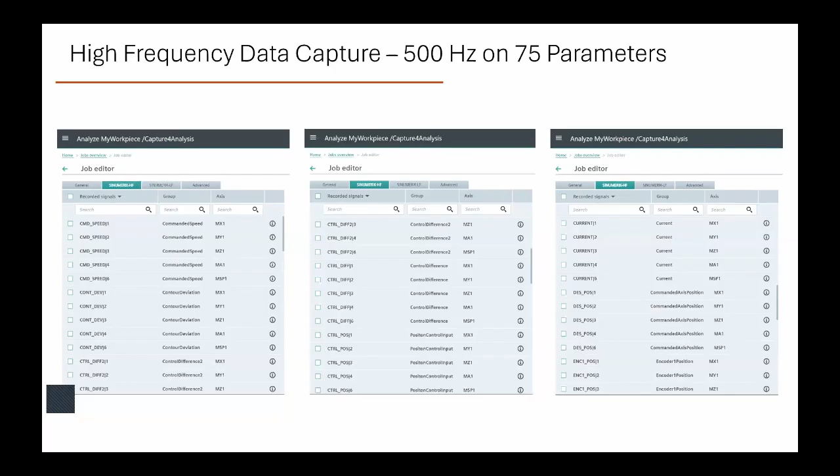Data being all of these factors here, right? My commanded speed versus my actual speed, the power consumed by each one of the motors, the actual axis position. So in this case, with the edge device that we have for the particular robot, and we've exercised this on the machines that we have that run the SINUMERIK One, we can collect 75 parameters at 500 hertz. That means 2 millisecond delay. So imagine a scenario where I cut 10 parts. I have all this data, and I have the result of that manufacturing process through the inspection.

Now what I can do is a correlation model. It's called a predictive model, where the next time I'm producing that part, if I see the signals going a certain direction, I can predict what the feature dimension is going to be rather than waiting to measure it. And I can do course correction through the edge device and through the SINUMERIK One, through the R parameters. You can actually do tool length, tool radius compensation, spindle speed override, feed rate override through R parameters. And you can do it through standard communication protocols like OPC UA, or from the edge device using an edge application.

So I just mean to bring this to your attention in case you had more interest in learning specifically about the digital thread and digital twin. I'm going to bring up the QR codes on the videos that go into depth about those subjects in a few slides here. And I just wanted to introduce the project that we've been working on here at the Advanced Technology Center. This is for you.

Now we're switching over to resources available to you as manufacturers. We're with our tech partners, and we couldn't do this without Siemens and ThinkPLC, creating an autonomous cell. The autonomous portion of this is leveraging digital thread for automation of production programming and leveraging the digital twin for controlling manufacturing variability. Those two combined we're terming as autonomous. And the goal of the cell is to bolster innovation and advanced manufacturing practices towards an Industry 5.0 future. It's really for you; we don't produce anything here. We're constructing the cell specifically so that you have access to this technology.

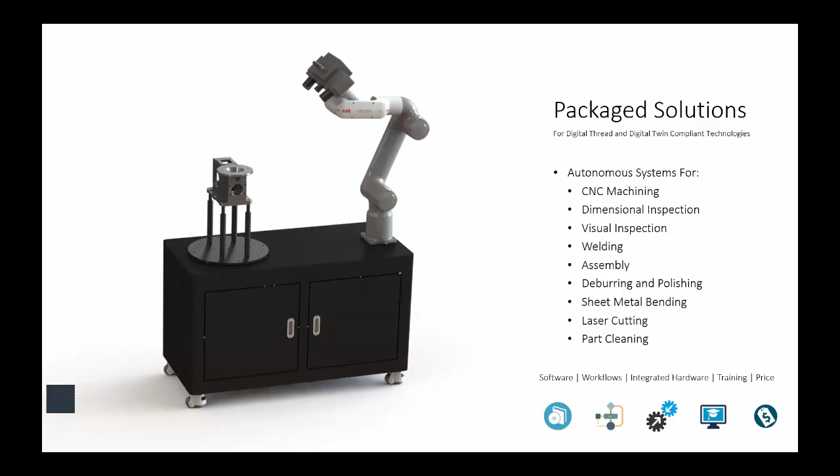These are some of the cells that we're doing. So CNC machining, dimensional inspection, visual inspection, welding, assembly, deburring and polishing, sheet metal bending, laser cutting, part cleaning. You'll see some of that when we walk over.

When I say package solution, we're talking about software, the workflows, right? If you're going from one software to another, what is the file format? How do you export it? How do you import it? What are the functions within the software that you can leverage for an automated workflow? Integrated hardware, like you just saw with the ThinkPLC solution, training at the Digital Thread Lab so you can upskill your workforce to be able to use these technologies effectively.

And then grants. We can support you. The state of Connecticut offers a lot of different programs that CCAT administers, one of them being the Innovation Voucher Program and Manufacturer Voucher Program. This gives you up to $125,000 if you combine both of them, for you to purchase these technologies.